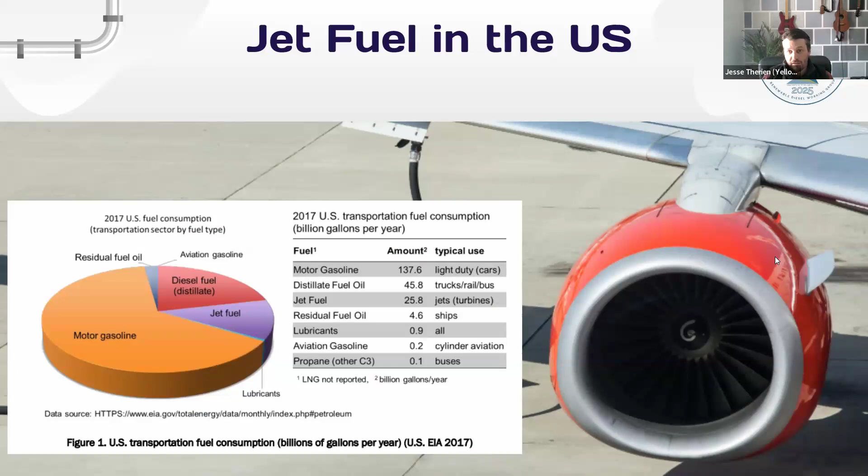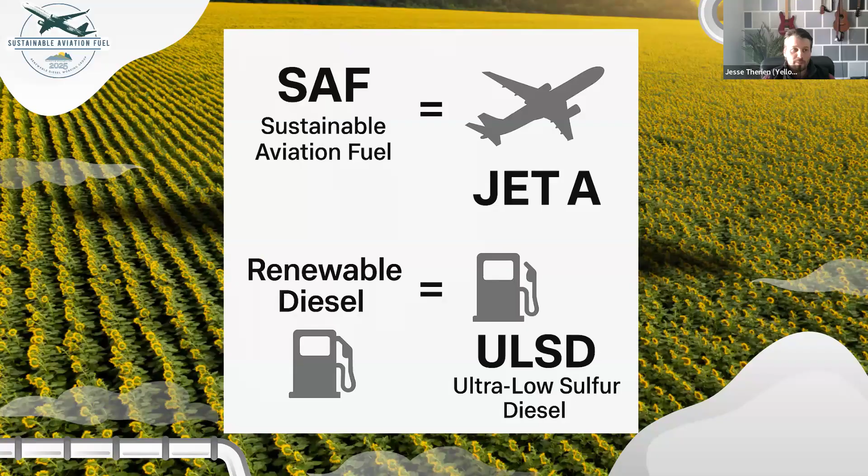And so here's the correlation. I actually had AI make this for me. Not that I couldn't have made it myself, but SAF, sustainable aviation fuel, is to jet fuel, or Jet A, as renewable diesel is to ultra low sulfur diesel. So that's the relationship and why we're talking about it.

Jet fuels can be broken up into many different categories. There's Jet A, Jet A1, Jet B, there's JP 1 through 10. There's SAF that we're going to be talking about, and there's Jet B. And there's slight differences between all these fuels. Between Jet A and Jet A1, it seems the freezing point is the main difference. So in Alaska and Canada in the winter, they would use a lot of Jet A1.

Jet B appears to be a mix of like gasoline and kerosene, or naphtha and kerosene blend, and it gets it even to a colder point. So for very, very cold conditions, you can use that. JPs were military blends, and they vary all over the board.

And so Jet A for sure has an ASTM standard, D1655. SAF also has an ASTM standard. This is the same as petroleum diesel and renewable diesel. They have their own ASTM standards, but SAF has its own ASTM standard, D7566, and that's within the 1655. So it's sort of a substandard within Jet A standards. So it meets all those, but it has some other things with it as well.

And SAF, I won't get into it much, but SAF is rarely used 100%. It's used, I think, 20 or 30% up to 50% in current jet engines. The reason for that seems to be that a lot of the seals and the rubber maintain their elasticity because of the aromatics that are found in petroleum jet fuel, because they've been designed to work with that fuel.

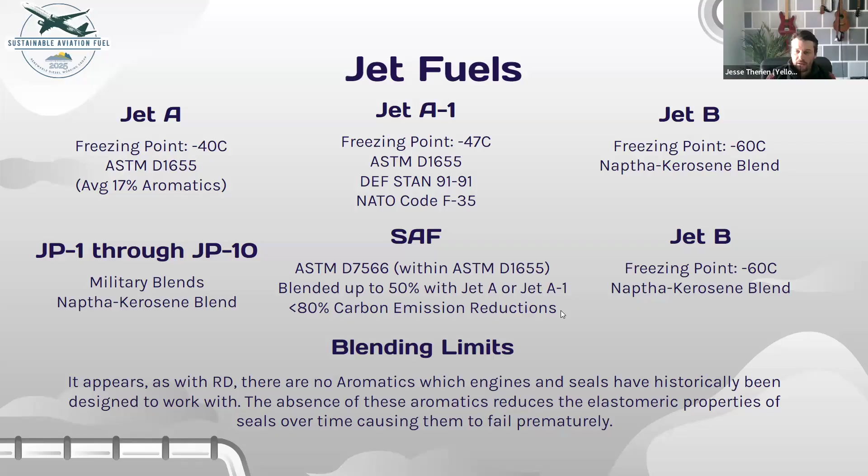So the difference between SAF and jet fuel: jet fuel is made from crude oil. Sustainable aviation fuel can be made from many things, but it's renewable feedstocks. So vegetable oil, animal fats, garbage, hydrogen, ethanol, all these can be precursors to making sustainable aviation fuel depending on the pathway that's used.

Of relevance to us in Montana, we have Montana Renewables, which produces renewable diesel, but they also produce the largest volume of sustainable aviation fuel in North America. So they are a big player here. And then late last year, they were awarded an almost $1.5 billion loan from the Department of Energy to expand SAF production specifically. So it's going to grow. That's the intent, and I think the demand is there.

These images were pulled from a company, twelve.co, and they focus on maybe what you could think of as potentially the cleanest way to make SAF, which is using carbon dioxide and hydrogen and electricity to make SAF. And I'll go into the economics of that in a bit, but it may seem leaned to that side of things.

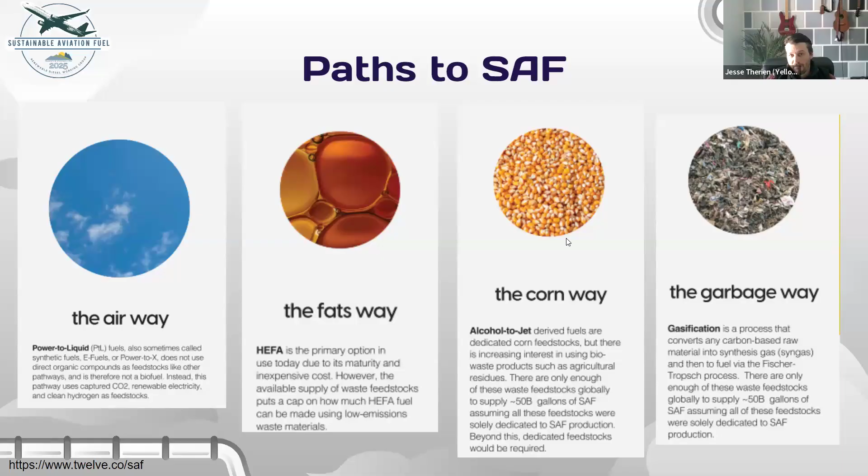I'll get a little bit into some chemistry because that's how I often think. And so the way that you can make sustainable aviation fuel with animal fats and vegetable oils is how it's made in Great Falls. And that's the primary way that it's made in North America. And I think in the world, that's the method most used to produce SAF.

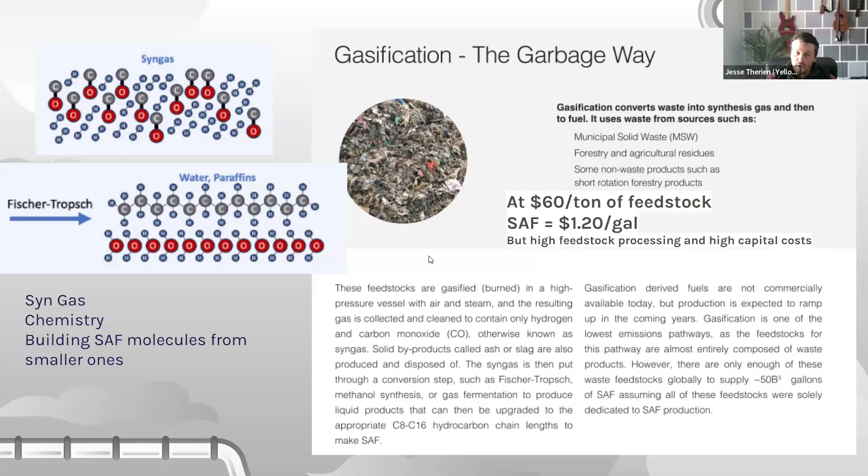So at $60 per ton, that's the average cost of garbage that works in this process, SAF would cost about $1.20 per gallon. So it seems really low, but to get those feedstocks cleaned up to a stage where they can actually be used in this process is very expensive. And the equipment and setup and process building for this is also very, very cost prohibitive. So right now, it's not the cheapest way to do it. It costs a lot to do it this way.

And then the last method I'll touch on, and there are many variations of each of those, and I think there are one or two other ways, but these are the primary four. This way is to take carbon dioxide out of the air and get hydrogen, which you could get from electrolysis of water, and to get carbon monoxide and hydrogen, and that's syngas, and then using that syngas in that same system to build up a larger molecule. So this has no organics, so it's not really a biofuel, but it doesn't have any crude oil, of course.

And so in this case, to produce hydrogen via electrolysis takes about 60 kilowatt hours of energy to produce a gallon of SAF. So it really hinges on the cost of electricity. If you have free electricity, this could be a very cost-effective way. If your electricity here, for example, is 13 cents a kilowatt hour, it would cost you $7.80 just in electricity to make a gallon of SAF this way. So it really requires cheap, clean electricity to do it this way, but you can make it almost from thin air.

The other thing that I did some math on here, at 60 kilowatt hours of electricity per gallon of SAF, 60 kilowatt hours of electricity will drive a regular EV about 180 miles. A gallon of SAF, and you could put it in a diesel car, would probably drive that car about 50 miles. So does it make sense to take something that could drive an EV 180 miles, change it so that it can drive something 50 miles? It doesn't make sense for a car, but for air travel, I guess it could.

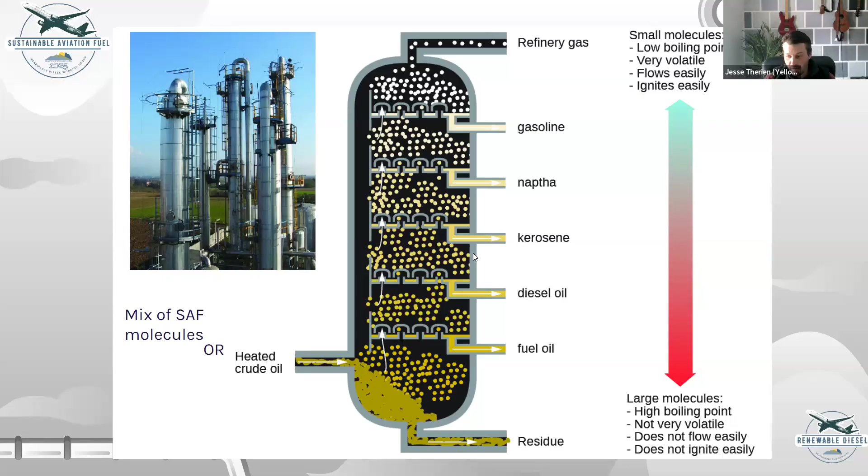Those are highly volatile. They boil off very easily. They have a low freezing point, so in cold weather, those would be great. And then the larger molecules settle out at the bottom. They take higher energies to boil them off. They're not very volatile, they don't work well in cold weather, and they're very thick. So at the bottom, you'd have road tar, motor oils, and at the top, you'd have propane, butane, and those kinds of really light things.

So for Jet A, or jet fuel, we're using petroleum crude oil as the feedstock. And so crude oil has a lot of different things in it. I've seen it broken down like this: 30% alkanes, those are just hydrocarbon chains. Naphthenes and aromatic rings are circular structures. Asphaltics, I've never even heard that. I thought it was aliphatics, but that's a different molecule.

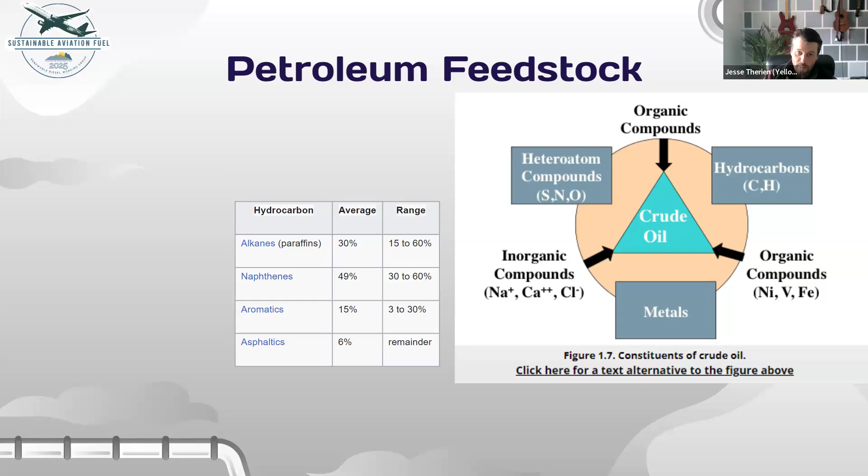So the point is, it's got a lot of weird, complex molecules in it. The image there shows that it also has inorganic compounds. There's calcium, sodium, chlorine. There are metals in there: nickel, vanadium, iron. There's molybdenum. There are a bunch of other metals in there, and so it's a really complicated mixture. When you burn a complicated mixture, you end up with an even more complicated emission profile.

So when you have this complex mixture of hydrocarbons in their typical refining process, to make it simple, you're just heating up this mixture, and the lighter products come off at the top. That's our methane, propane, butane. And then the heavier is your gasolines, so your 7, 8, 9, 10 carbon chain lengths, which is naphtha as well. And then as you get heavier, longer chains, you end up with kerosene, which is like number 1 diesel. Jet fuel, that's what's in there. Diesel is very similar, just a little bit longer chain. Then you get really thick oils, lubricating oils, and then tar and bitumen and all that kind of stuff comes off.

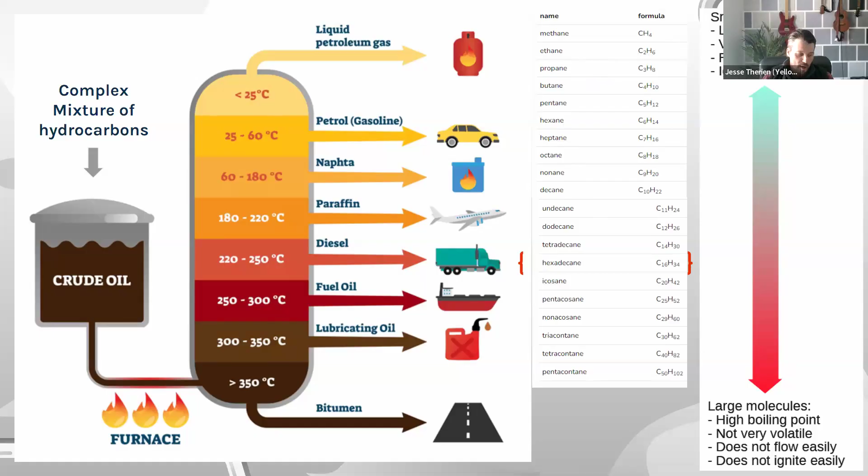So this is just chemistry 101. You have your 1 carbons: methane, ethane, propane, butane. You've heard of some of these things: hexane, heptane, octane, as you go down the list with increasing carbon chains. So you'll end up with all of these from a crude oil product. And depending on what is most in that crude oil, you'll end up with more of that product. You could also maybe tailor the process a little bit to prioritize one fuel, but you'll end up with a huge mixture like this.

So jet fuel is right around that diesel range, and similar to number 2. It's a little bit lighter, but the data I have to show here is for number 2 diesel, which is similar to jet fuel. You can see the distribution of carbon chain lengths in a typical diesel fuel. So it's anywhere from 9 carbons to 23 carbons. The bulk of petroleum number 2 diesel is 16 carbon chain length, which is hexadecane. And then you'll have less and less as you go further away from that peak. So that's what you would typically find in a petroleum diesel or jet fuel product. The jet fuel would be slightly lower, so it would be centered in on maybe C13 or something.

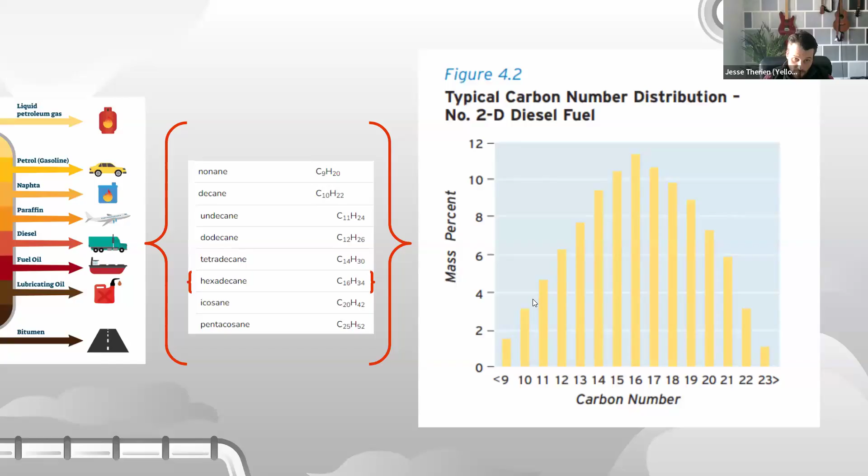So in each of these carbon chain lengths, a C10 there shows a mass percent of 3% in a number 2 diesel. It's comprised of many more than I show here, but on this table, there are 7 versions of a 10 carbon hydrocarbon. So you have naphthalene, tetralin, cis-decalin, all these different things. And you have decane, which is the simple straight carbon one. Some of these are aromatics, and some of them are very toxic. And that's just for the 10 carbon chain. If you look at the 14 carbon chain, you have anthracene, all kinds of different things. So not only does it have a dozen carbon chain lengths, but each of those have dozens of molecules of that chain length.

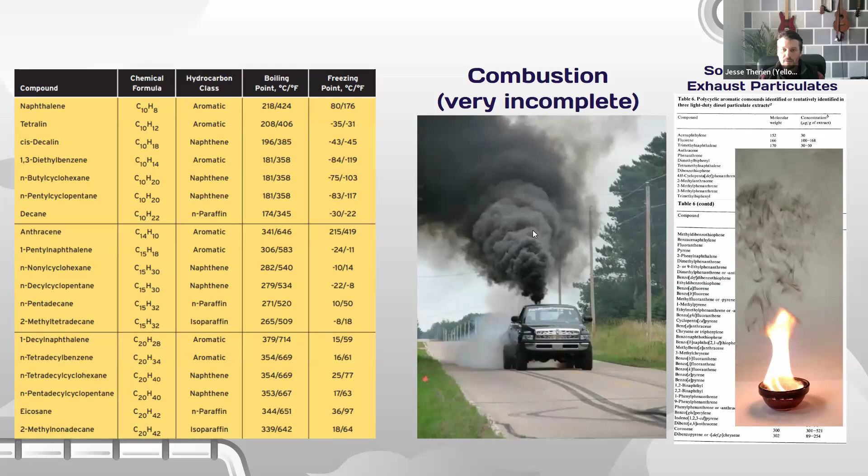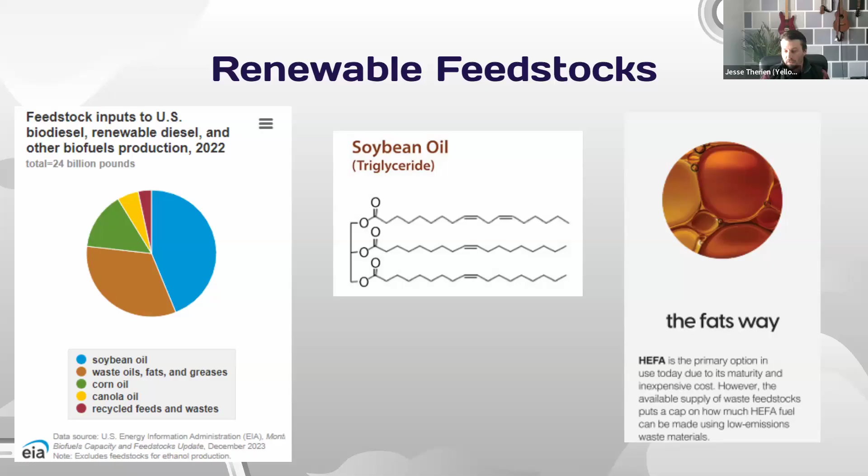So you're not going to end up with metals or aromatics or vanadium or iron. Those don't exist here. So that is not one of the things you're going to see in that fuel. Again, it can be made from things beyond soybean oil, all these different methods, but soybean oil is the primary route for the production in North America, so that's what I'll focus on.

So similarly, instead of a complex mix of hydrocarbons, we have a simple mixture of hydrocarbons, just triglycerides, essentially. There'll be some fatty acids floating around, but they're all made from that one main molecule, so you don't have all kinds of things. And because you don't have all those things, you're not going to get all these different distillates come off it. You're not going to get bitumen out of it because there isn't a huge long chain of that in there. You're not going to get lubricating oils necessarily because you don't have those long chains.

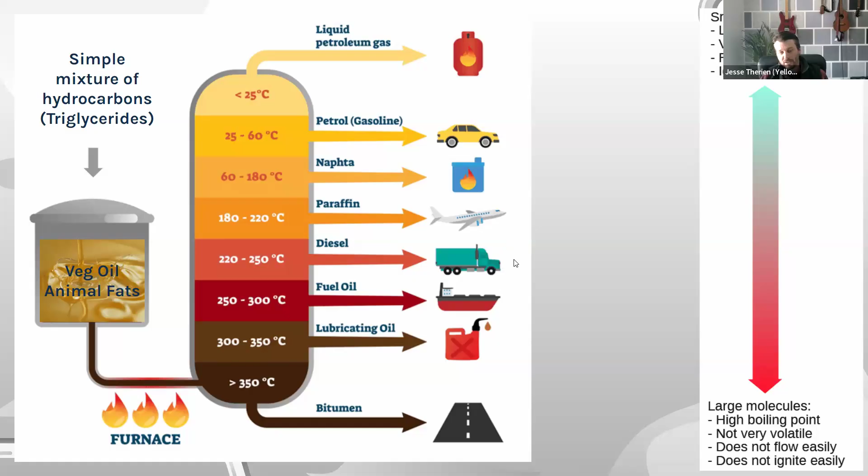You're not going to get a ton of methane and ethane. You probably will get some because those molecules can break down smaller, but they're not inherently in vegetable oil or animal fat. So you get a much narrower range of products, which I kind of show here. You're not going to see all these things because they don't really exist in the feedstock.

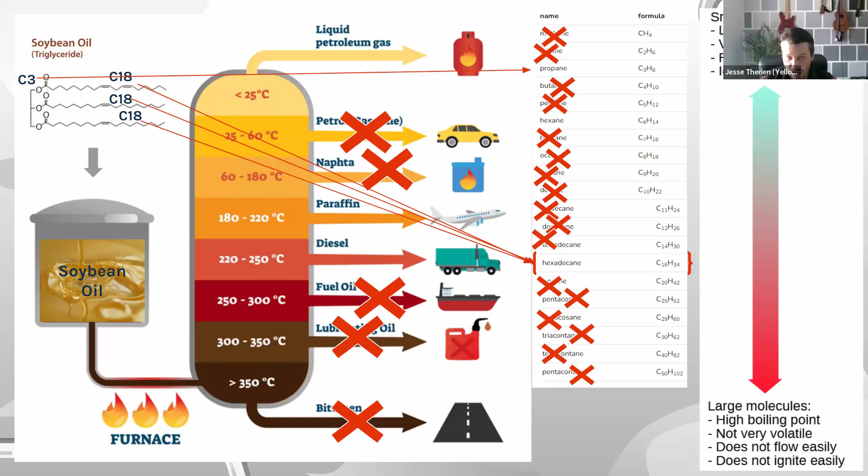Yeah, so on the top left, you can see that chain from soybean oil is an 18 carbon. So it's not hexadecane, it's two bigger. So it's a C18. You'll get three of those, and you'll get a bunch of C3, which is propane. So those are the two distillates you'll get off. You won't get a lot of the other things, but you can get some because chemistry happens in there, but the primary products should be those two.

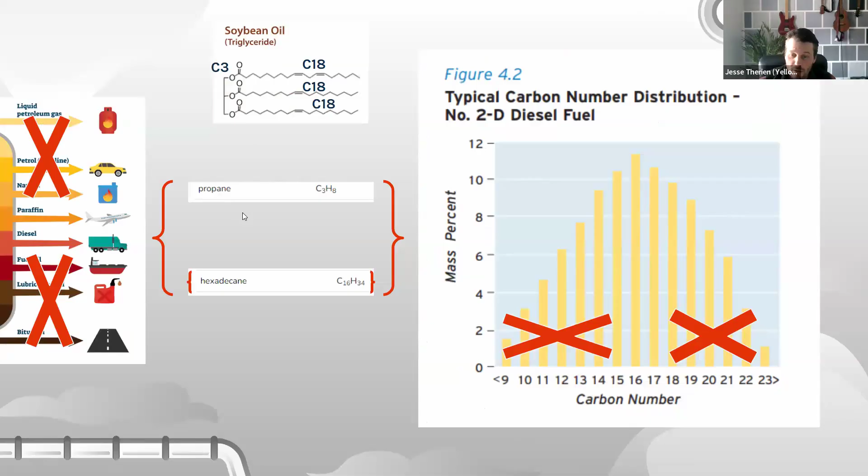So again, you don't see this wide distribution because it doesn't really exist. So you eliminate a bunch of those products in SAF or renewable diesel. You get a bunch of these two products. So when you burn them, you're not going to get an infinite number of emissions. You're going to get a much narrower range of particles that come out.

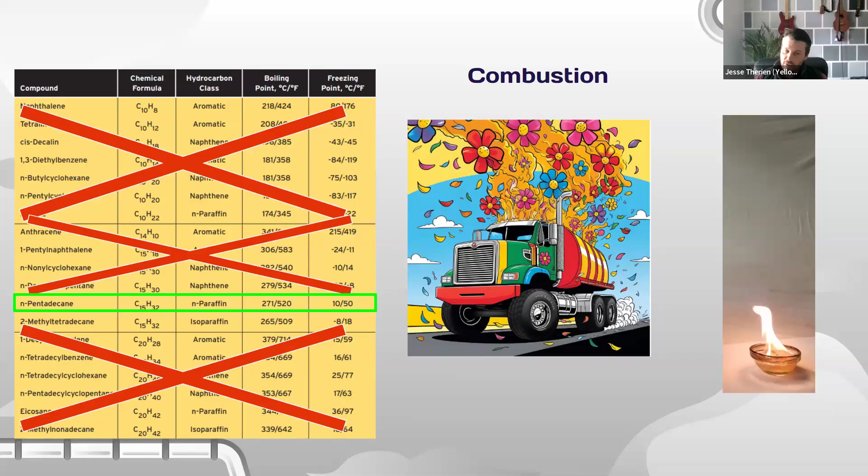And so when you burn it, you get flowers that come out. Maybe not flowers, but you can see on the right, this is the picture that I took showing renewable diesel burning. Same energy, same everything, but you don't get all the emissions coming off.

So I knew that most of our SAF produced in Great Falls went to LA, to LAX. I was told some goes to Calgary because it's a close international airport. They've sent loads off to Minneapolis and Detroit. Those are the ones that I'm aware of. And I know other places have it, but the bulk of what we make here goes to California.

And I found this website showing where private jets can purchase fuel and which airports have SAF. And it said that we have SAF here in Bozeman. So I called, not our airport, but this aviation company, and they confirmed that they have it there. I followed through with some numbers, calling some places. I got through to somebody in Dusseldorf, Germany. I talked to somebody there, and I'm waiting to hear back.

I think I have it. No, I don't have it here. But they have a book and claim method for all of these airports. So if you want to fly from Jackson to somewhere and you want to use SAF, and they're a member of this group, then you can pay the extra for the SAF, even though you're not burning it, and it'll put it into a different plane, which I've been kind of advocating for a while.

We don't have to ship the fuel to LAX, just put it in the planes here that are going to California, and it's the same thing. So they're actively doing that. I'm trying to learn more about it, and I'll let people know if they're interested on what I find out.

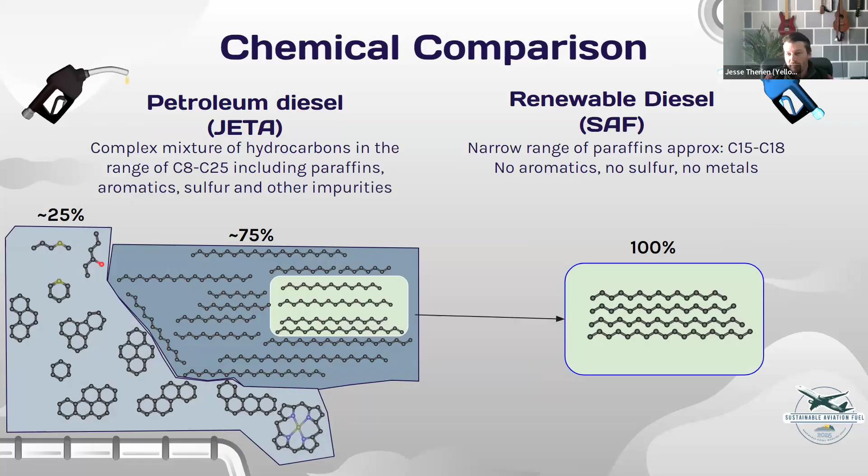Now with SAF, Jet A needs some of these aromatic hydrocarbons, these cyclic rings. It needs those to keep the rubber gaskets and things conditioned properly because they've been built with that, and that's how they've been designed to run forever. They can make them that don't need that, but currently they need it, and that's partly why we are limited to 30 to 50% SAF. And what I've read also is that in SAF, they're finding ways to make these cyclic hydrocarbons and adding them in there. So it would be an additive that would then let you run 100% all the time.

And again, when you burn that complex mixture, you get complex soot and emissions, and the simple renewable diesel or SAF is not nearly as sooty.

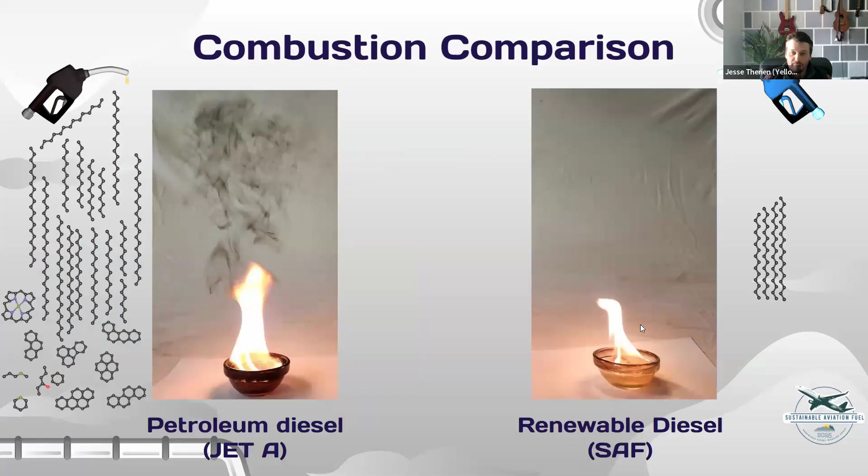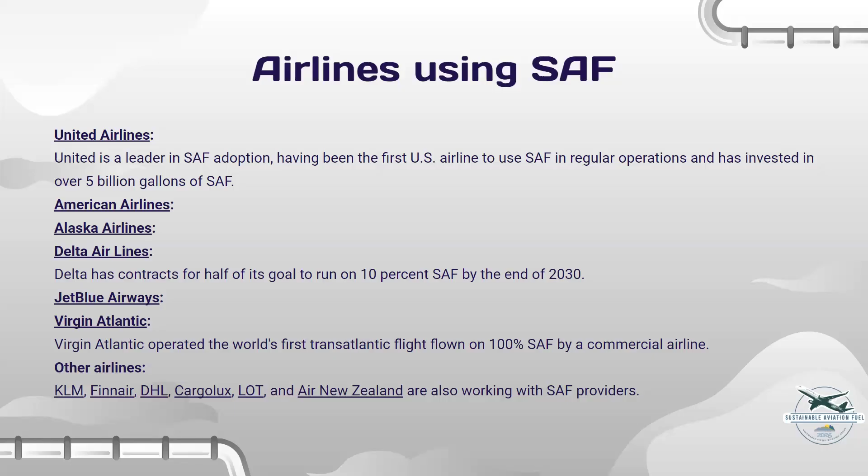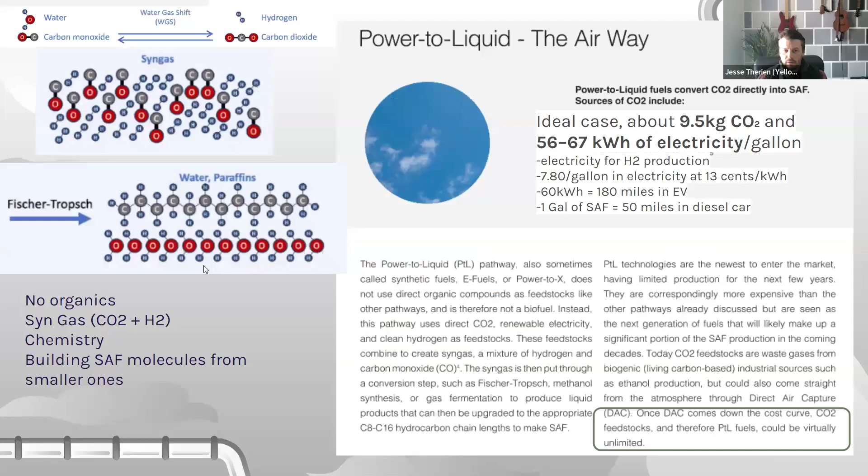Jesse, I don't know if you can answer this or not, but you had talked about a rather large loan to Montana Renewables that was helping them produce SAF. Can you comment on whether that funding is at risk, or if that was delivered? It was at risk a while ago, because I think it was announced in October, November, and then in January it was held back, and that was a big deal, and then they did get the first half of it, so I think they got 700 million.

And I think they've been given this 700 million already. So I think our governor fought, at least he claimed he did, to help release it. I think it's going to go through, and I think they've gotten half of it already. And in one of these previous working groups, we had Michael Wojciechowski mention it, and I think he went through what that expansion is going to entail.

And so from that 1.5 billion, they plan to triple their SAF production, which will also increase the renewable diesel production, and those can all be tweaked at any point to focus in on one fuel versus the other if needed. But if anybody's interested in the details, he went through what that expansion hopes to accomplish. Thanks for that update. Great to know that they got some of that. Yep.

Any other questions about SAF or renewable diesel? Yeah, real quick, Jesse. Oh, go ahead, Russell. Yeah, hey, thanks for doing these and keep doing them, please. I know you're thinking you're starting to run out of topics, but these have been just so good. I might have missed this in the beginning, but wanted to check on some of the producers for SAF, if you could highlight any of those. I don't think I had them here. I always know that Montana is the number one.

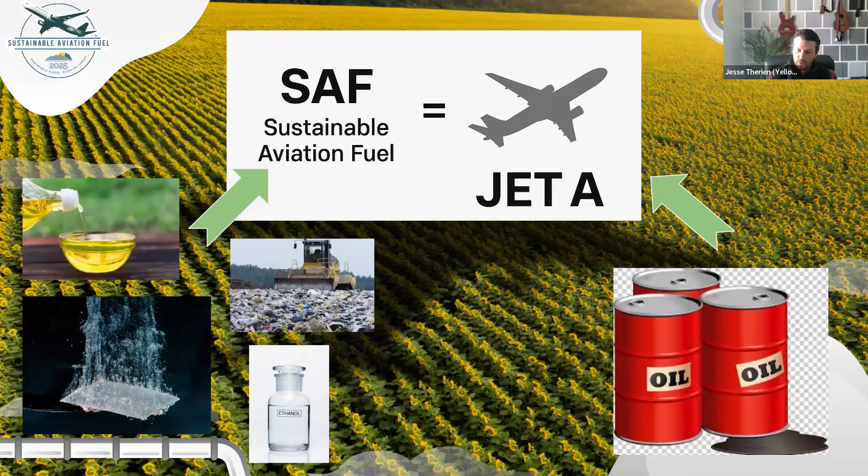And then I guess I can finish up with a couple of recaps. As far as I understand, Jackson Hole had no issues all winter so far with their renewable diesel use. Big Sky continued to use it this year, no issues. Stillwater Mine, I don't talk about it much because they did it for other reasons, but I actually met a guy yesterday or Sunday who worked there for years. He was a mechanic. He said he remembers when Stillwater Mine, which is the US's only platinum palladium mine, it's here in Montana. They used to use biodiesel because of the emission reduction, and it's an underground mine.

Then Sibanye, which is an African company, bought them up, and he told me they chose to stop using bio or renewable diesel, whichever they were using at the time, because it was too expensive. Within about a month, OSHA or somebody came and shut them down that day, said you have to shut down, the particulate matter in the air is unhealthy and you have a week to fix it. So they quickly just went back to renewable diesel, the premium, and then immediately that issue was resolved and they could open up again. So it shut down a multi-billion-dollar mine because they were using petroleum, and renewable was the solution. I heard about this, but he worked there and saw it firsthand, so he confirmed it.

All right, any last questions or ideas to talk about next time? Having learned a little bit about SAF here, making this presentation, I have some ideas. I'd like to get this guy from Germany about the book and claim and how well it works globally. That's kind of getting off of our regional goal of talking about renewable diesel, but it's something newer and interesting.